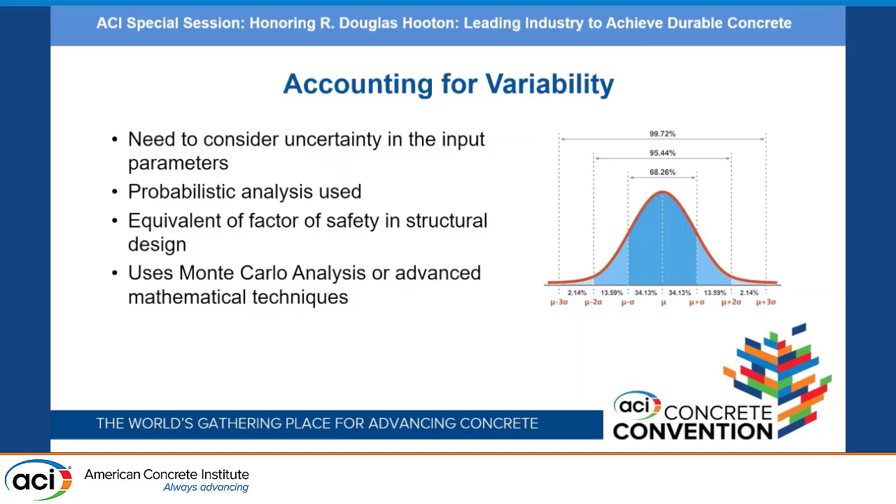Often probabilistic analysis becomes important, where you use Monte Carlo analysis or some other statistical techniques. The accepted probability of failure, though, tends to be much higher than it is for structural analysis. We're typically at 10%, like a 90% or 95% reliability, depending upon the structure. Often it comes down to whether it can be easily inspected or not.

And the reason why it's lower is you get this trade-off between performance and cost. We could make it a 1 in 1,000 chance, but then you're paying a lot more money. So given the impact of long service life design, it doesn't make it unsafe, it just means you may need to fix it a little bit sooner. Where the industry is heading now is that kind of reliability, much lower than safety, because it really is a serviceability concern.

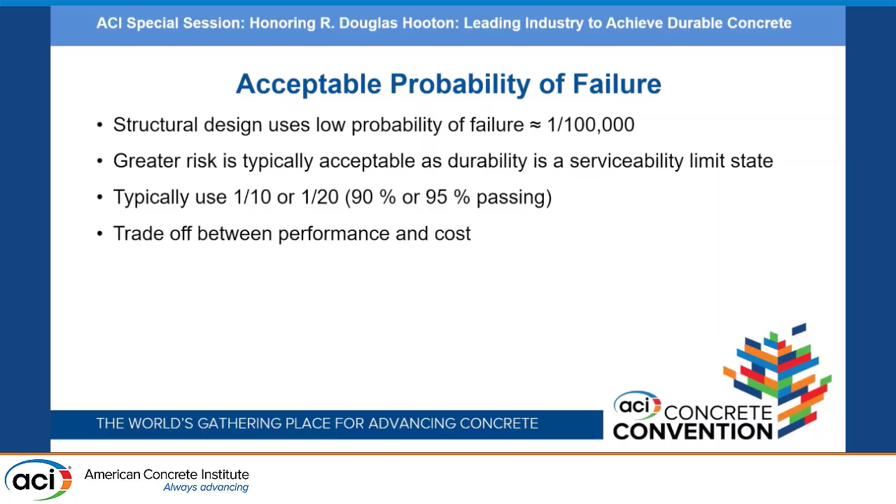So for the study I looked at chloride-induced corrosion and used the Life 365 model, which was developed at the University of Toronto while I was there. I'm sure Doug wasn't the direct author, but he certainly had a lot of influence on it. It's primarily an initiation model, so it looks at when the chlorides get to the level of the steel. There's a few tweaks to it: it looks at time dependence of the diffusion value and probabilistic analysis.

But really, I was just using this as a model to try to demonstrate the impact of variability. Is this the right model? Is it the only model out there? No, there's other ones. The same concepts would still apply.

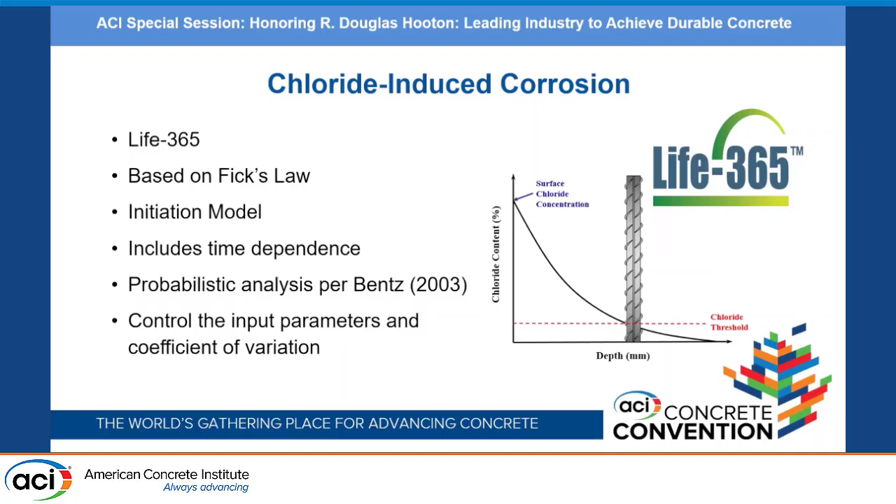So as a demonstration, I used two different types of concretes, pulling the parameters. These are typical ones you may see in a structure. I looked at 3 inches of cover, urban bridges, and you can see those two different mix designs. You put that all into Life 365 at a deterministic level, so that's using the average values.

You get about 30 years for mix 1, and then the higher quality mix, it predicts 203.1 years. Whether that's accurate or not, I couldn't say, but again, this is just for demonstration purposes. But then when you bring it down to a 10% probability, just using the default variability values from Life 365, that brings it down to about 35 to 45% of what the deterministic, the average structure

would be. You're down to 13 years you're predicting for design purposes for mix 1, and 71 years for mix 2. So that really has a significant impact on what your predicted service life would be, which conversely we converted to the effect on what mix you need to provide to demonstrate you fulfill your contractual requirements.

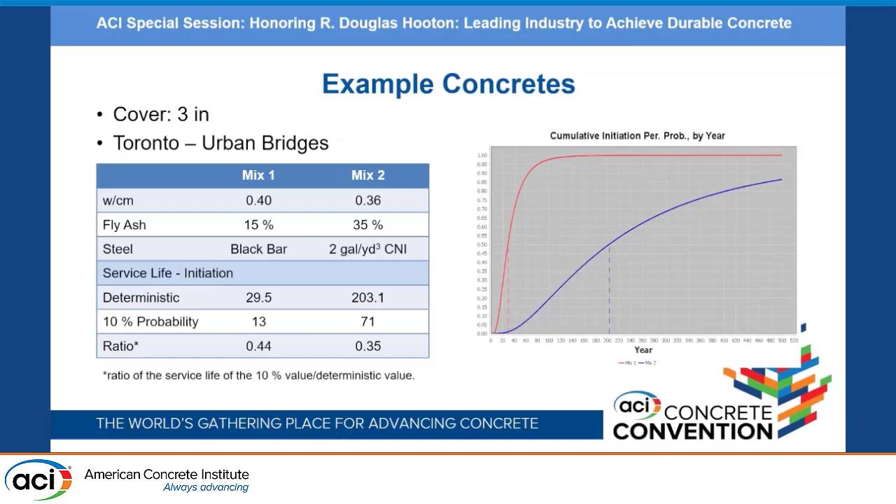So my big takeaway about this is you really need to understand what your variability is going to be, so you can properly account for that in your prediction model, so you're not over-penalizing yourself because you expect a higher variability, but at the same time capturing what would be out there. You want to get the right values. And I respect what they did way back when they made Life 365 available, but those were best guesses at the time, and we need to look at them and see whether they're actually accurate or not.

So I looked at 3 different parameters that really are important for service life: the surface concentration, the concrete cover, and the diffusion value. So an exposure property, a materials property, and a geometric property, how it's constructed, and what impact they would have on your predicted life. We do operate Tourney. Part of Tourney is a lab.

We do extract cores and we profile cores. So we went back to our database and dug out a few examples where we've done multiple cores from the same structure, and we looked at what we were getting, what the coefficient of variation is there, and how good the guesses were when that was put together.

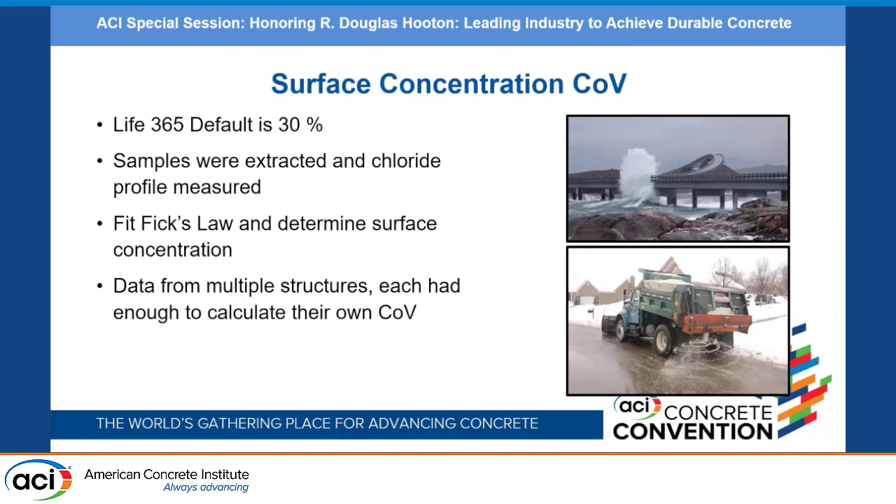So for surface concentration, the first one was all the same project, but multiple structures. It's a fairly long bridge system, and there were multiple samples taken from basically each span that allowed us to get different values and coefficients of variation for each span. And we found that the coefficient of variation ranged from 17% to 60% for this de-icing exposure, this one project.

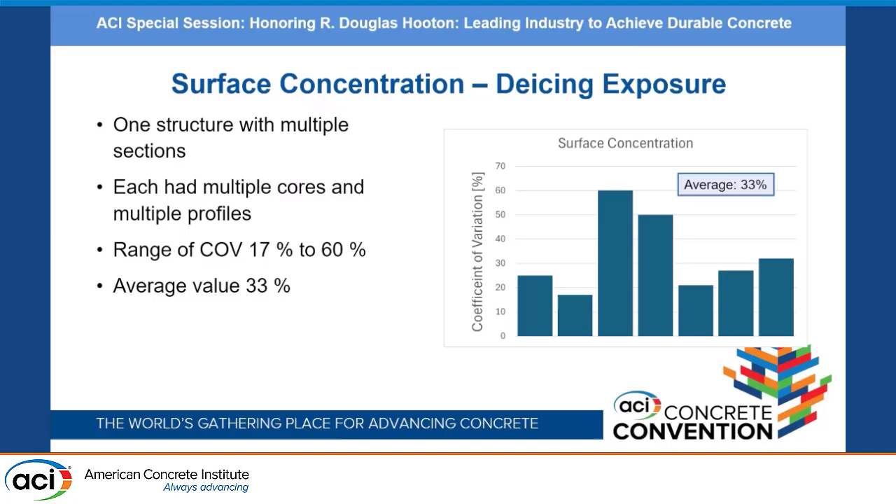But if you average them all together, we got 33%, which was like, yeah, that's pretty good. I don't know if they got lucky or they were good, whichever way it is, but 30% seems to be a pretty reasonable estimate. So not a bad start, but obviously it can vary much more significantly, and this is for de-icing exposures. We also pulled marine structures, primarily piers and wharfs.

We've had a number of projects where we've extracted cores from different elevations, different exposure zones: the atmospheric zone, basically the top of the deck, and then the splash, tidal, and submerged zones, different locations within the piers, within the piles. Couple of different things. First of all, not quite as accurate as 33%, though overall it's not too bad.

But the one thing I found more interesting was it was higher for the atmospheric zone, and then as you went to more consistent immersion in the water, your coefficient of variation for the surface concentration decreased. So that may be something we should think about: for areas in the splash, tidal, or submerged zone in marine concrete, maybe we can reduce the variability, and that would have a beneficial effect, so we don't need to over-design the mix as much.

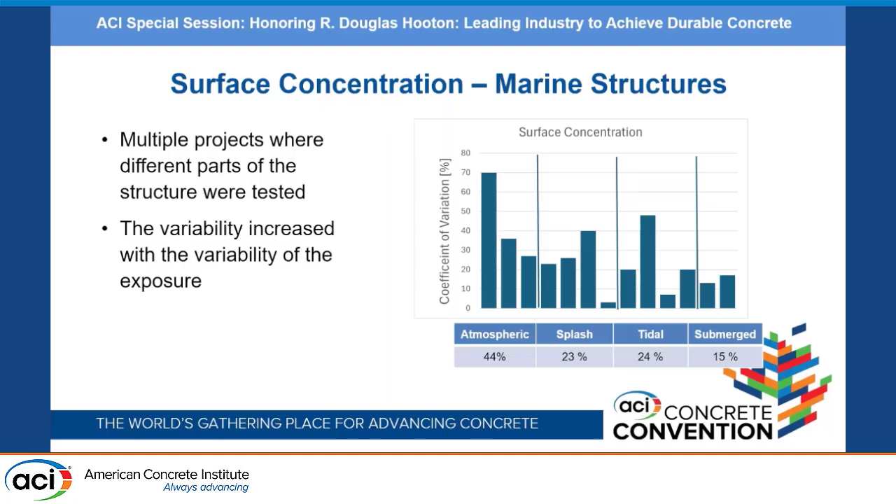Second one we looked at, the diffusion value. Life 365 was 25% as the default. We looked at, again, these are a number of, it's the same, nominally the same mixture, but from different batches and different locations. I think this is from that same first project where we looked at different spans, and we looked at what the coefficient of variation of the multiple tests within that spans.

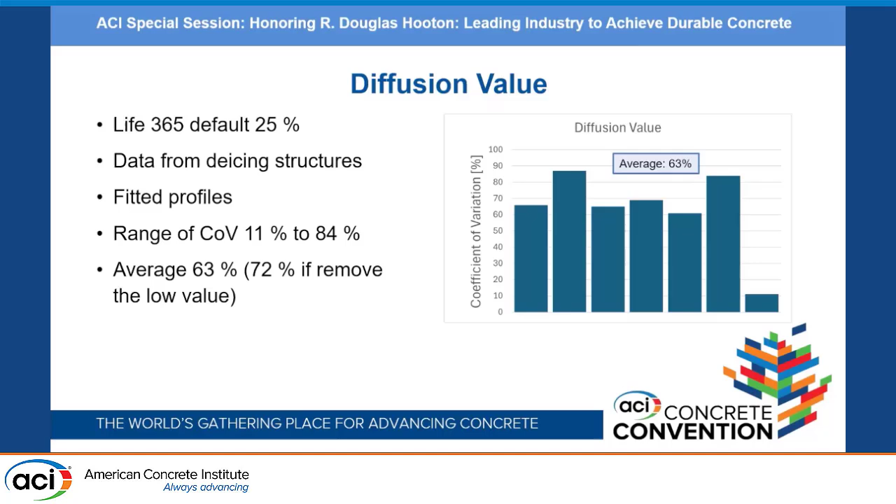But I think one of the things we're trying to do is keep mining our data and looking at, well, if we've done multiple tests of a newer structure that's not 75 years old, where is it at, and is it a tighter value? Oh yeah, so that's what this is. I forgot I had this in here. This was one where we actually went to 1556, where these are existing structures. They're not as old, and we were able to get uncontaminated samples.

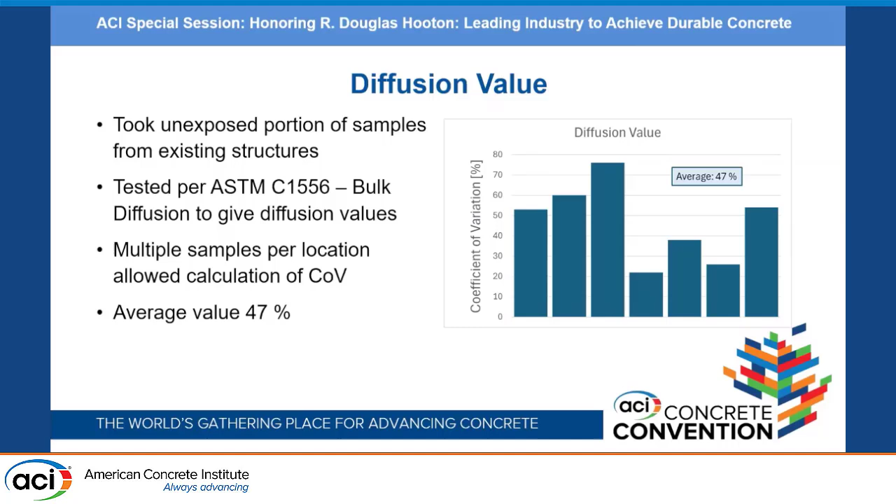We took the bottom samples, so we actually were able to run the 1556, which got rid of some of the other variability from exposure conditions, and we can see that the value dropped to about 47%, so a lot better, and anything helps. But again, it is a whole construction project, so how it varies along the construction, but you can see it's still fairly high, more than we were anticipating way back when Life 365 was put together.

Cover was the third one we looked at. We kind of look at it two ways. The first one is the tolerance from ACI 117, it's a little more complicated. You have a half inch of tolerance. So we consider, if a half inch of tolerance, 95% of the bars should be within that half inch. So half of that half inch will be your standard deviation. So you get a coefficient of variation that's a function of your cover. The bar moves the same amount, but your cover's more, so the coefficient of variation is less.

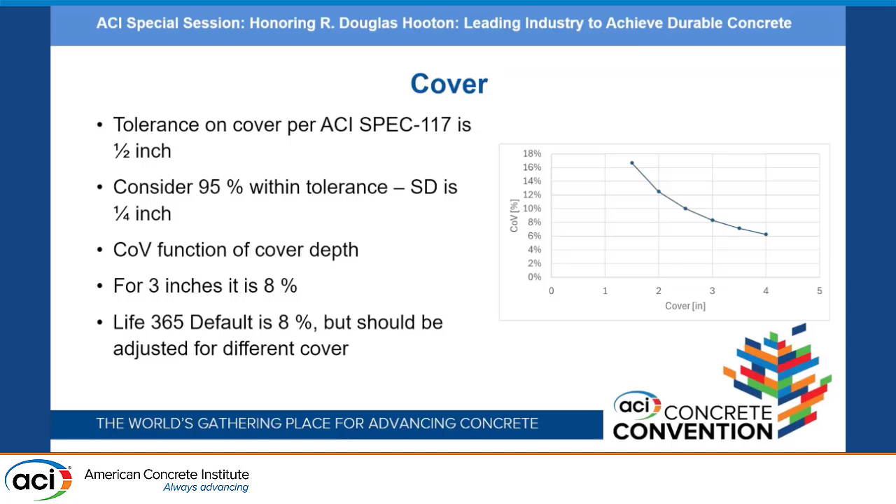Nice thing about that, for a 3-inch cover, which is the one I happen to pick, 8%. And I don't know where the Life 365 default came from, they may have went through that whole thing, or they may be lucky or good. But 8% was the default value. So from a different way of looking at it theoretically, we should be considering this coefficient of variation as a function of the cover, but the default value is not too bad.

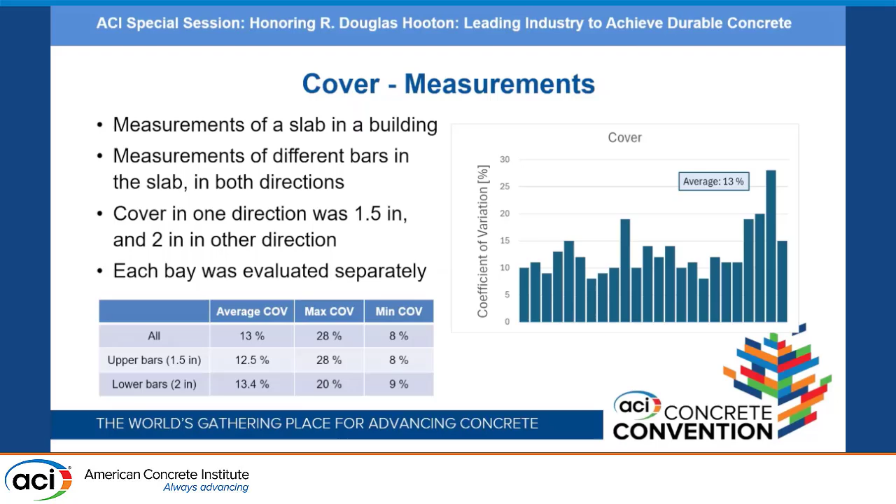But we then found another structure. This one is more of a parking garage inside of a building, so that could have an influence on it. And we'd done a whole bunch of measurements. Cover in one direction was 1.5 inches, 2 inches in another direction. So we looked at each bay and calculated the coefficient of variation, and that's the bar graph on the right. The average value, if we looked at both directions, was 13%, ranged between 28 and 8. It didn't really change much if we just looked at one direction or the other. It's higher than 8%, but considering that the cover is less, it really follows that pretty well.

So last thing, just to kind of get a feel, like, what do we really care? I ran the same two mixes, different exposures, coefficient of variations, and adjusted the variability. The first line is what I've shown you before, and then the bottom four are all the different scenarios. And you can see it does have an impact on that ratio between the 10% versus the mean value. But again, we're really looking at around 30, 35%. So you really need to increase your performance by 3 times when you start looking at it probabilistically.

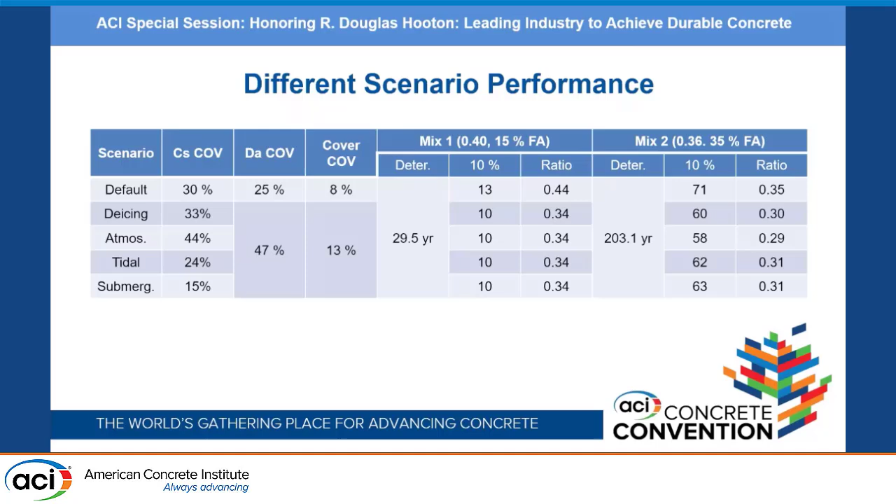So that's what I've kind of been thinking about recently. We really need to look at the variability and try to tie them down before we can use them as part of specifications, as a way to figure out really what's going on. And ideally it should be from project-specific testing. The Life 365 values are not too bad if you don't know anything else, but particularly the diffusion value probably should be increased a little bit.